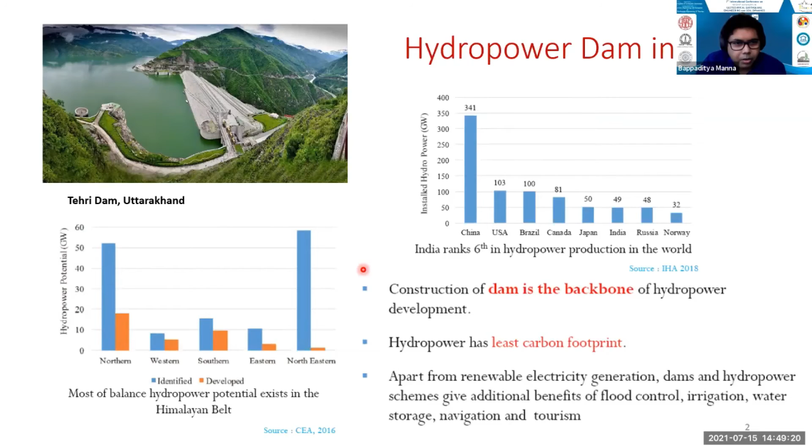Now, if you see the problem of dam foundations, it happens because there are a lot of uncertainties involved in the properties of the rock which exists at the identified potential site. Because the dam is a massive structure, it develops high stresses in the foundation due to the large load imposed by the dam body itself. It has been found that 21% of failure cases happen due to foundation failure from the excessive load of concrete dams. So therefore, the most important problem we found is the soil structure interaction with the dam and rock foundation, due to troublesome geology, which needs greater attention.

And we need to understand that if there is some joint which is filled with clay material, or if there is some shear seam existing at the site, how to build a dam foundation with proper design.

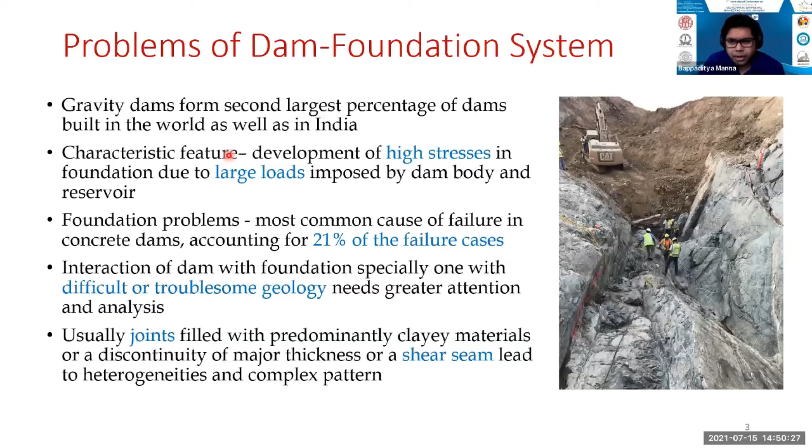So therefore, this kind of similar problem arises at a certain location. I'm not disclosing the location because of the NDA agreement between IIT and the client. There is one site proposed for a hydroelectric project of about 1200 megawatt power, and we found that on the right bank of the site, a huge rock slope failure happened, and therefore this part became very unstable. Cutting of the slope was not possible, because whenever we cut the toe, all the slopes started failing.

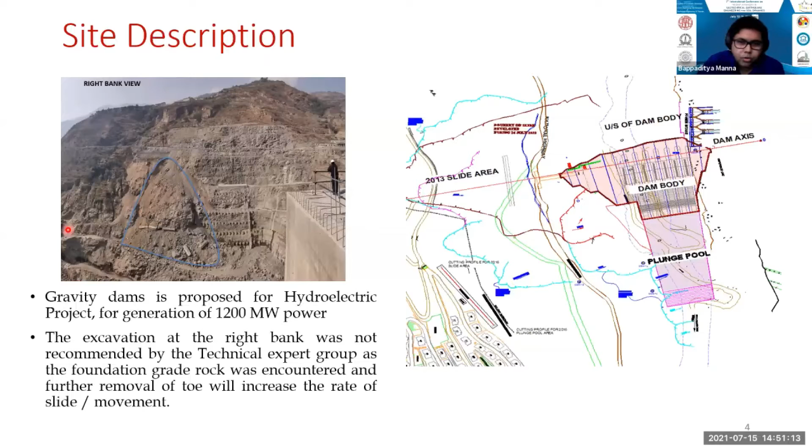And you understand there is a huge mass. If this kind of failure happens, the whole thing will just be crushed away. So therefore, the client approached us and told us that 1 to 13 has been proposed.

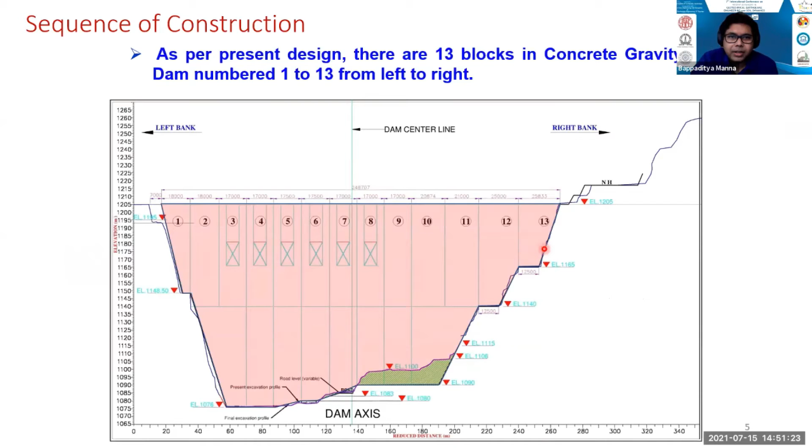These are the 13 different segments of the dam, out of which 1, 2, 11, 12, and 13 exist on the left and right part of the slope, which is okay. But in 8, 9, and 10, there was a lot of weathered rock, and if you start cutting here, you may reach the parent rock or the foundation rock.

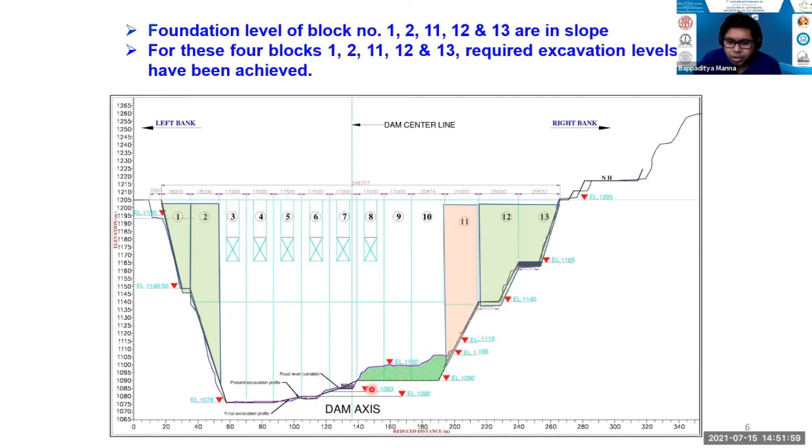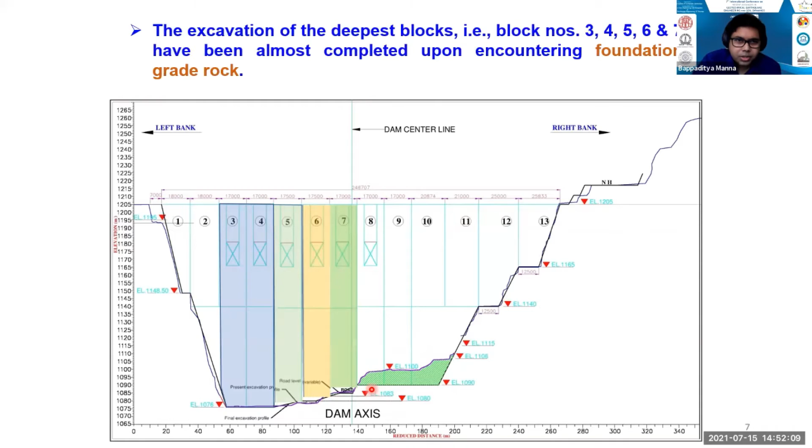But the problem was that when you start cutting this part, the whole thing may get collapsed on the right bank. So there was an issue of how to tackle this problem and what the possible solution is. So 5, 6, 7, and 3, 4 are also okay because they reached up to the foundation grade rock, so the construction and excavation can be done there.

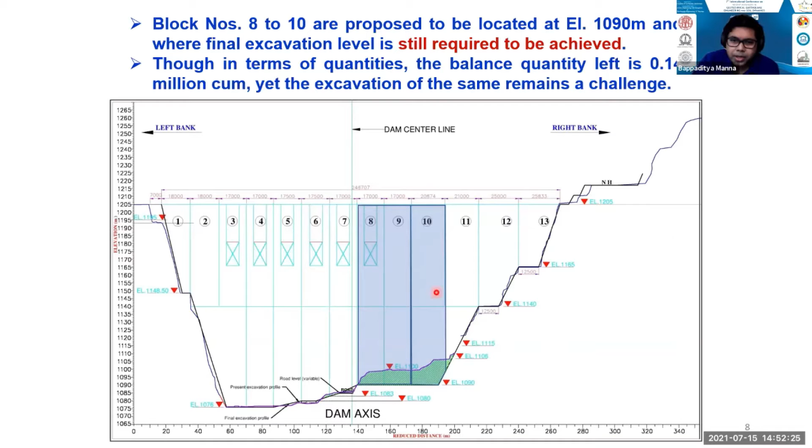So the challenge arises for blocks 8, 9, and 10, where you can see a lot of loose material exists, and you can't cut it because the right bank slope will become unstable.

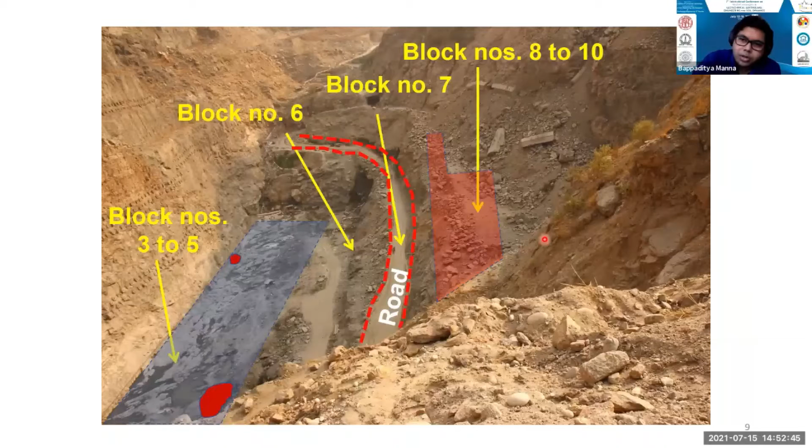So you can see on the site location, this is the location of block 8, 9, and block 7, 6, 3, 5. There was no issue there, but here there is an issue because you can't excavate further to reach the parent rock or foundation rock, because otherwise the right bank will collapse.

And one more challenge was that during the soil investigation or ground investigation, it was observed that a shear zone exists at the exposed cut slope, lying just below between blocks 6, 7, 8, and 9, having a thickness of around 8 meters.

So therefore, they suggested not to excavate further, and that we need to first take care of the shear seam and also the loose soil. So there are two things: one, we should not cut further because of possible collapse of the right bank, and two, we need to take care of the shear seam existing below the foundation.

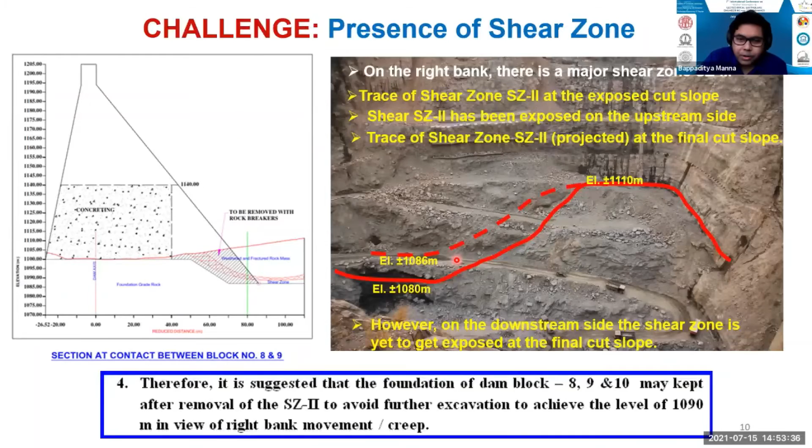So therefore, they suddenly came up with a solution: why not place piles at certain block numbers? So they placed pile foundations at blocks 8 and 9, expecting that the maximum load from the superstructure, meaning the dam, can be transferred to the parent rock or bedrock, so they can avoid stresses of the load on the shear seam. That is basically the load transfer they are expecting, so that you can place this foundation and build a dam at the various blocks.

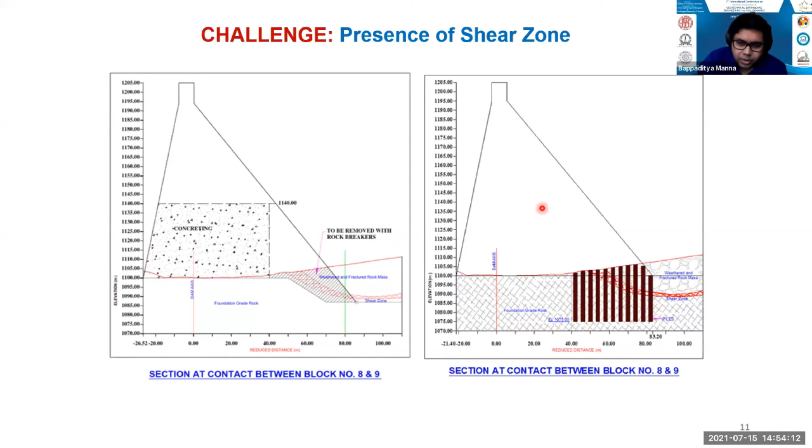So now the client approached IIT Delhi, so we worked out the design philosophy first, as per the IS code. IS 6512 is a very well established code for the design of the solid gravity dam. There are 7 load combinations.

I am talking about this part because this conference is more inclined to the earthquake. So here I will show how we can take care of load combination A with the earthquake and load combination B with the earthquake, and how the result comes out, whether it is in favor of the design or we need to go for some modification.

And another thing is that the earthquake analysis has been done with two cases: one with the pseudostatic analysis, and one with the site specific seismic data.

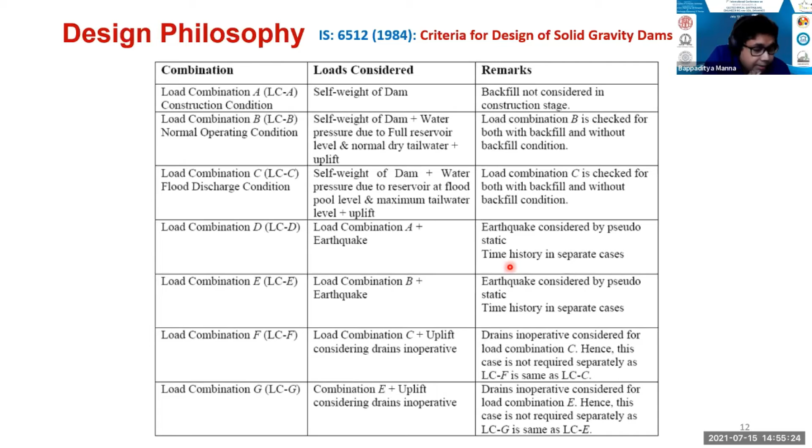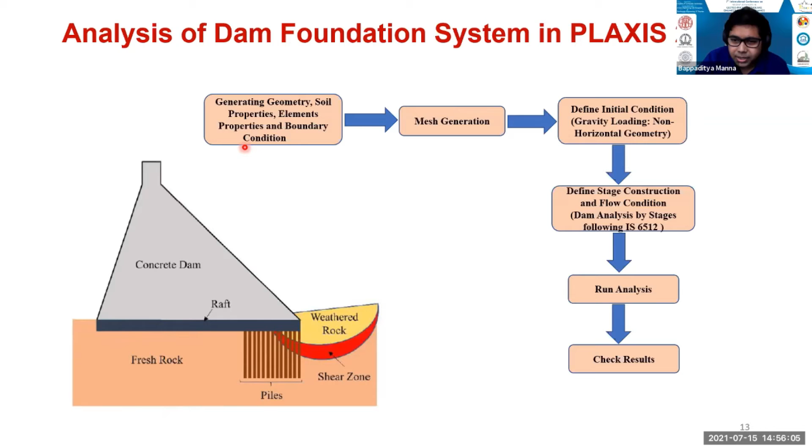This is the standard procedure: creating geometry, generating the mesh, defining initial conditions, then stage construction as per the site construction process, then running the analysis and checking results. Here is the site map, and as per the same geometry and material properties available, we try to replicate the same thing in Plaxis.

I'm showing you the steps we follow. This is the dam, and we introduce the wave load, and this is the dam body. Here is the backfill material. Here you can see the weathered rock. There is some shear zone, pile group, raft and hydrodynamic pressure, and the fresh rock.

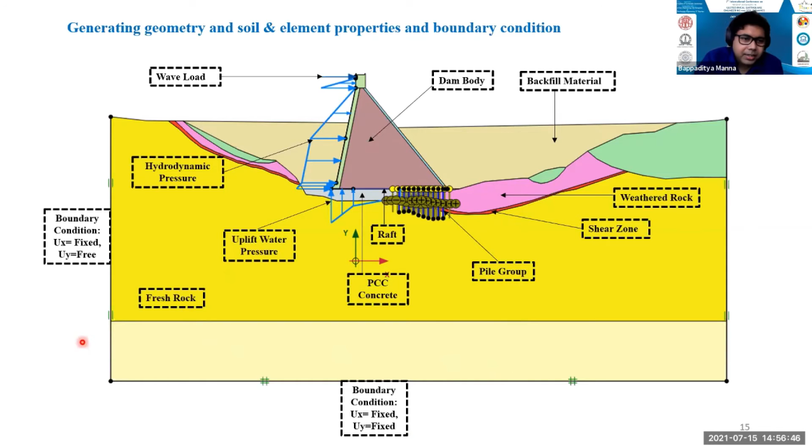This is a standard boundary condition. We consider the bottom fixed, and at the sides there is X fixed and Y free. This is a very standard thing.

As far as modeling is concerned, we consider the soil and rock with 15-noded triangular elements with cluster features, and the dam body is considered a 15-noded triangular element with polygon cluster feature. The raft is modeled with plate features, and similarly for the pile with plate feature, considering the effect of spacing in plane strain. The interface is considered to be a rigid element, meaning a rigid contact between the dam and the foundation soil.

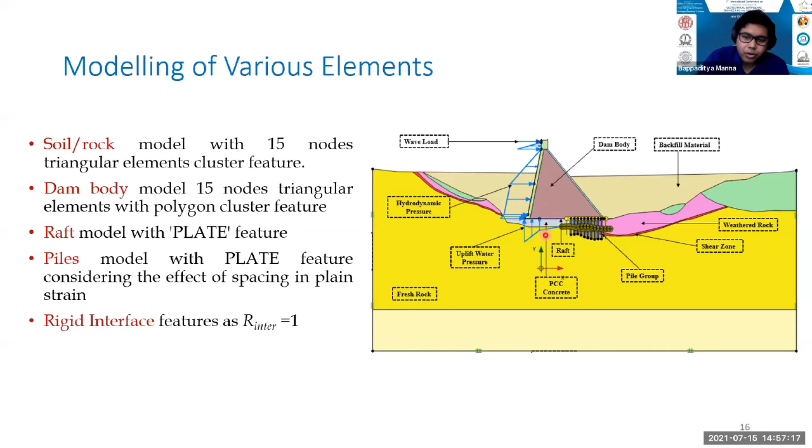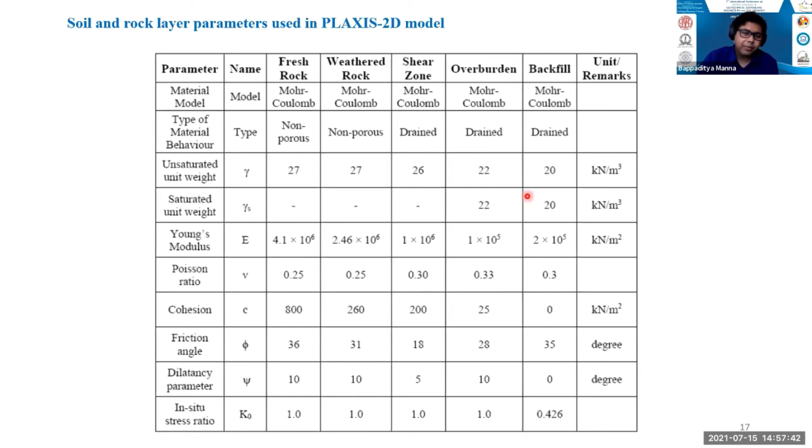These are the various soil and rock properties, based on soil investigation data obtained from the site. There are five major components: fresh rock, weathered rock and shear zone - though it's a big question how accurately we can get the properties of the shear zone - overburden, and the backfill material.

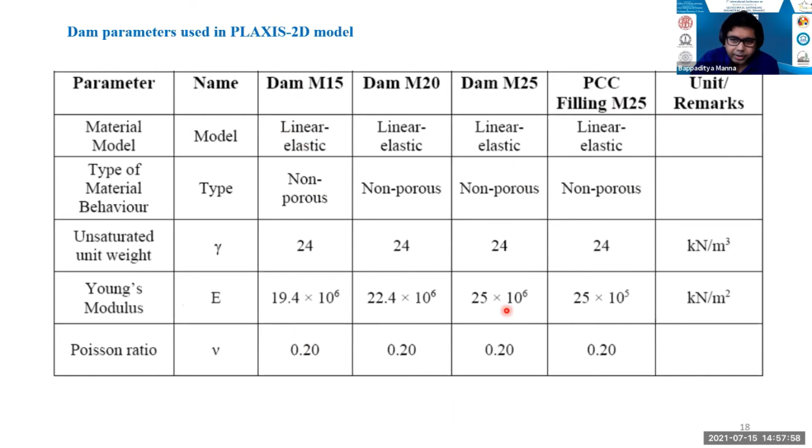These are the properties we obtained, and the dam parameters have been taken corresponding to M15. The PCC has been done with M25 concrete. These are very standard properties and standard processes.

First create and generate the mesh, considering the element with fine and coarseness factor varying from 0.25 to 1. For the initial condition, first apply the gravity loading to generate the in-situ stress.

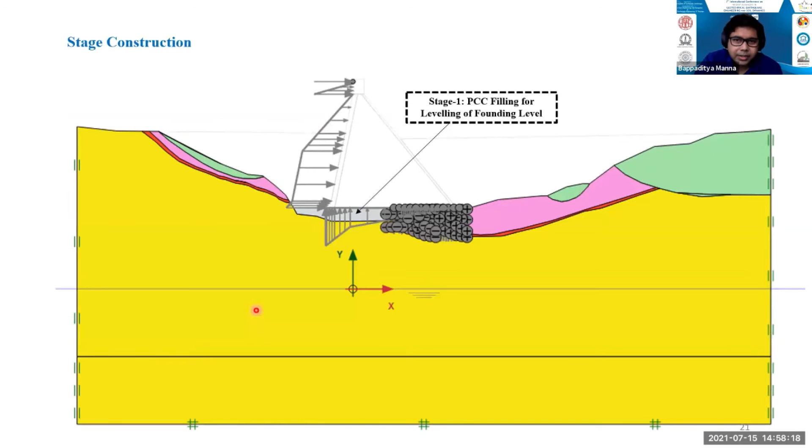The stage condition: first filled with PCC up to the foundation level. The second stage is the casting of the pile. Thereafter we cast the raft. Then we apply the load of the dam. The dam is constructed here, placed on the raft pile foundation system.

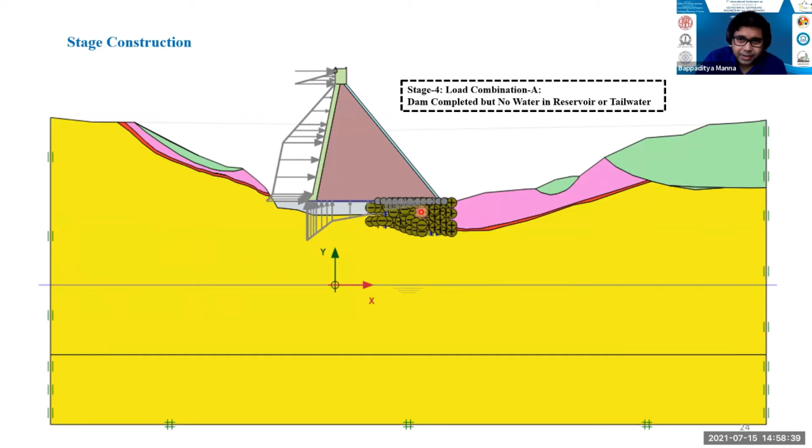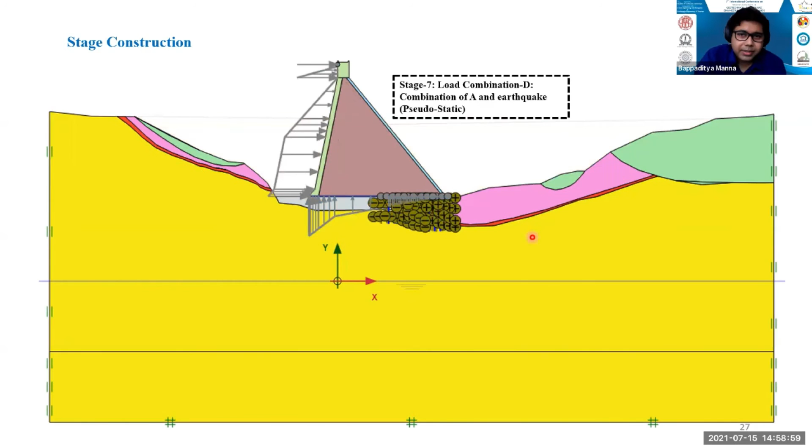In the first case, no tailwater is considered. In stage 5, we consider full reservoir elevation with no tailwater on the downstream side, and normal uplift pressure. Stage 6 is the reservoir at maximum level with all tailgates open, normal uplift condition. Stage 7 is the combination of A with earthquake, and similarly E is the combination of B with earthquake.

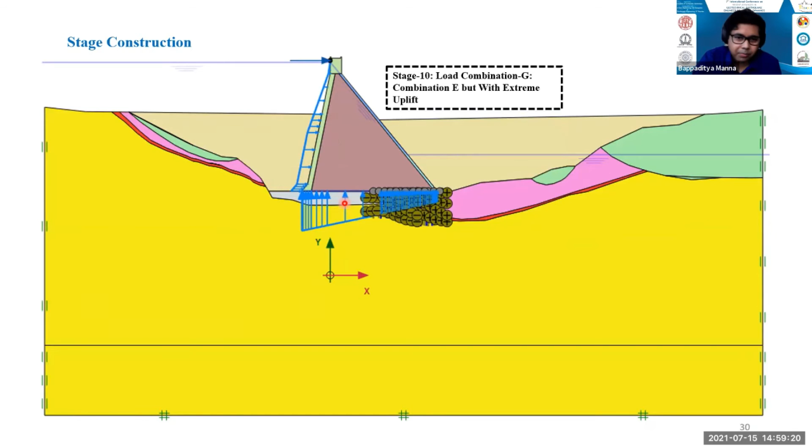This is the combination as given in the IS code, where all drainage holes are inoperative, for the maximum uplift condition. Similarly, load G is the combination with E, but with extreme uplift. So all combinations have been considered in the analysis.

Now I'll tell you how to get the parameters for the seismic condition and what results we obtain. As per IS 1893, the site belongs to zone 5, so we consider the seismic zone factor as 0.36. Our horizontal acceleration coefficient is taken as 0.36g, and vertical acceleration coefficient as 0.24g. This has been given as input to Plaxis.

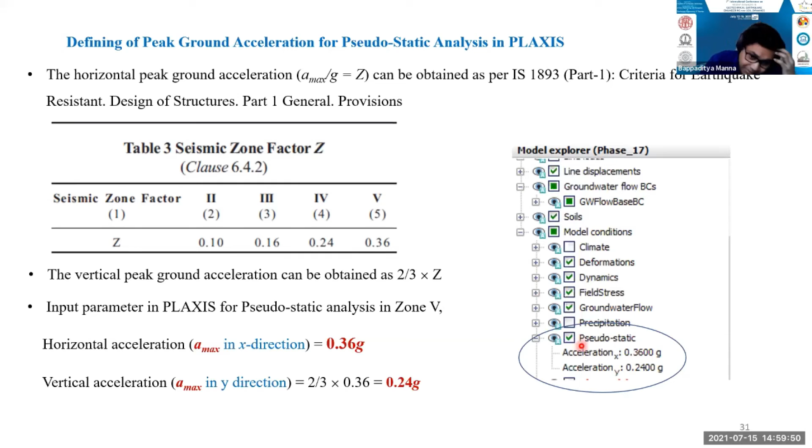The second analysis is based on site-specific seismic design parameters. A site-specific study has been done, showing the correlation of the epicenters of past earthquakes with major tectonic features. You can see different locations of faults - gravity fault, thrust fault, shear zone - and the project site location, with various magnitudes also indicated on this map. Based on that, the seismologist gives us two values.

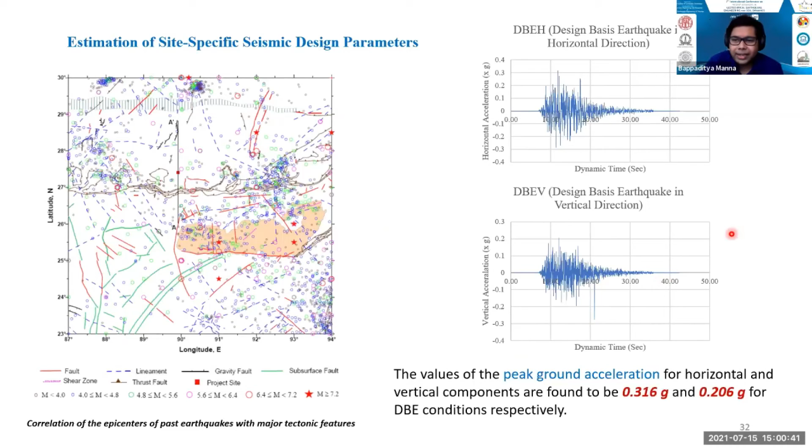One is the design basis earthquake time acceleration history in the horizontal and vertical directions. Based on that, the peak ground acceleration for the horizontal is 0.316g, whereas the vertical case is 0.206g. We apply both cases in the Plaxis model to see how the dam and foundation system respond.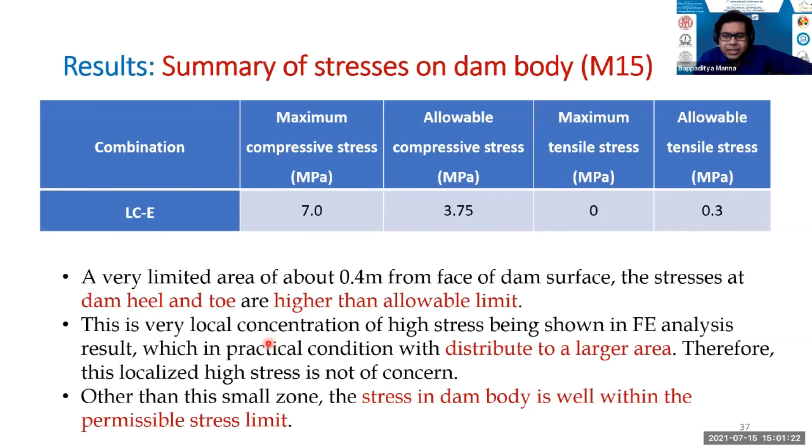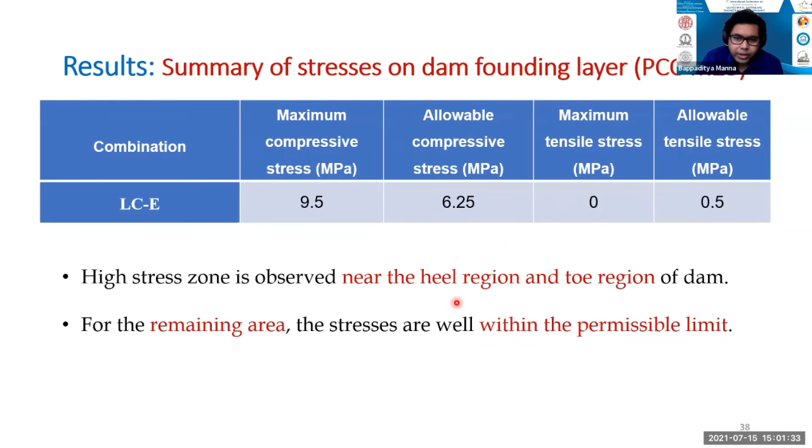What we found is that maximum compressive stress just exceeds the allowable compressive stress at certain locations, that is at the toe and heel level, while other parts are okay. Similarly, for the dam founding layer at the PCC level, it also exceeded near the heel and toe region, but other parts remain stable, within the permissible limit. Similarly, at the rock foundation, it has been found to be less than the allowable peak rock mass compressive stress.

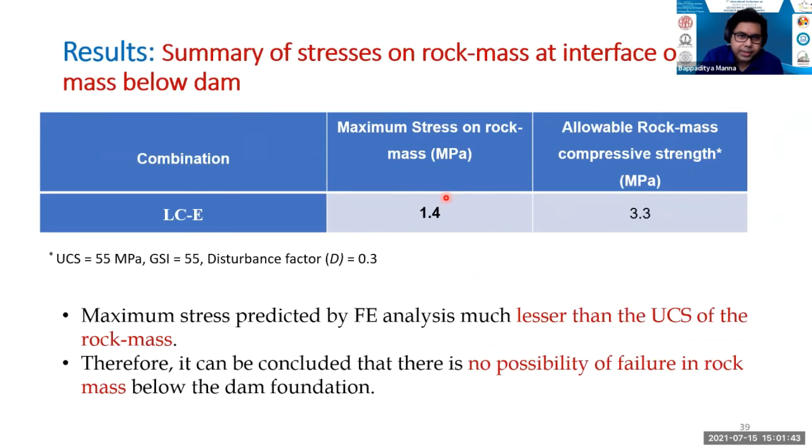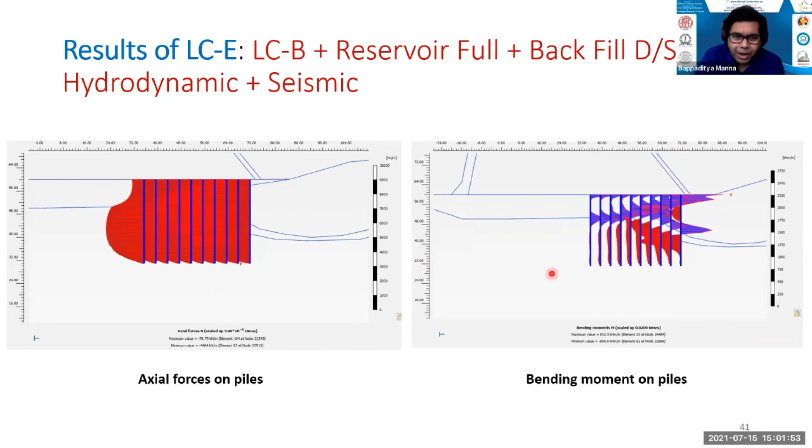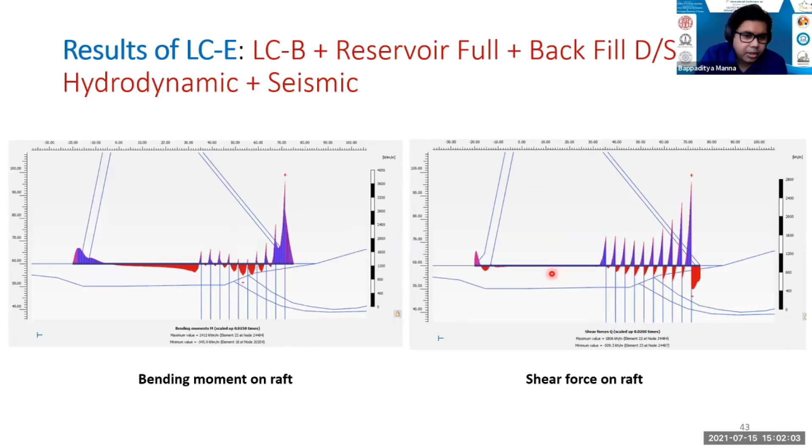So if you see the behavior of the structural members, that is the raft and the pile group, you can see the settlement response, the axial forces and the bending moment on the pile. This is the shear force of the pile that is required for the calculation of reinforcement. That is not the concern of geotechnical engineering, but we pass on all this information to the structural engineer. This is the bending moment and shear forces of the raft, which is very standard.

So what we found, as a geotechnical engineer, is that pile axial force is well within the permissible limit, because the allowable vertical pile load is around 4,000 tons, which is much more than what we get. And maximum settlement comes up to 43 mm, while the allowable is 50 mm.

If you see the latest code IS 16700, that is the criteria for structural safety of tall structures, it recommends 50 mm. But if you go by IS 2911 part 4, it says 25 mm. There is no code specified for what to take for dam foundations. Therefore, we adopted the value recommended for tall structures with raft pile foundations, so we went with 50 mm settlement, which is within the permissible limit.

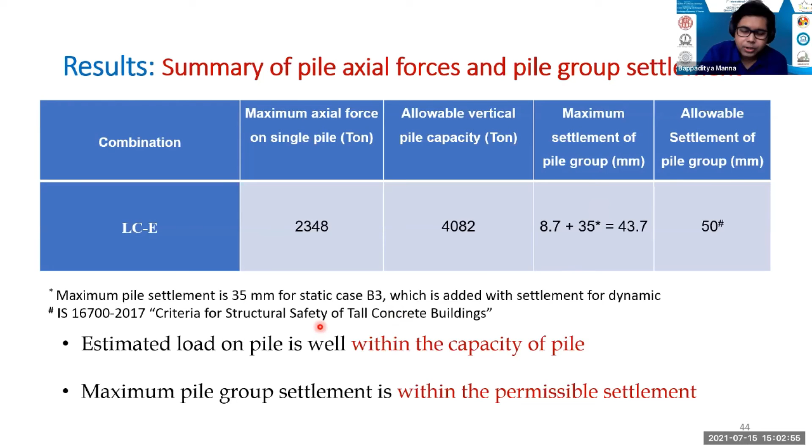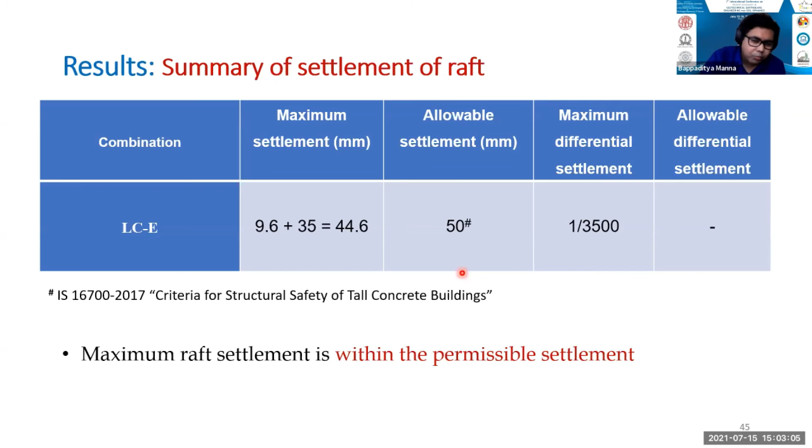Similarly, you can see the settlement of the raft is also within the permissible limit, but no maximum differential settlement criteria is given for the dam. This is almost negligible, so 1 in 3,500 is quite less.

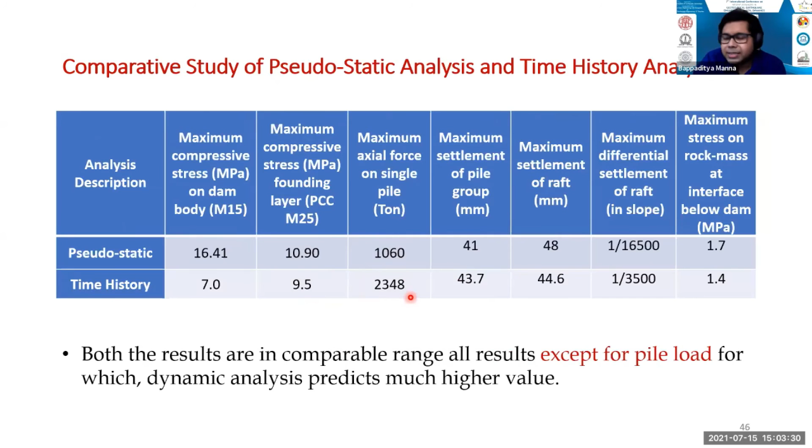We have also compared the pseudostatic analysis with the time history analysis, and we can see they mostly agree with each other, not much difference, except for the pile load, where the maximum axial load on the single pile is almost double. But still, with the time history analysis, that load on the single pile is less than the safe load carrying capacity of the pile.

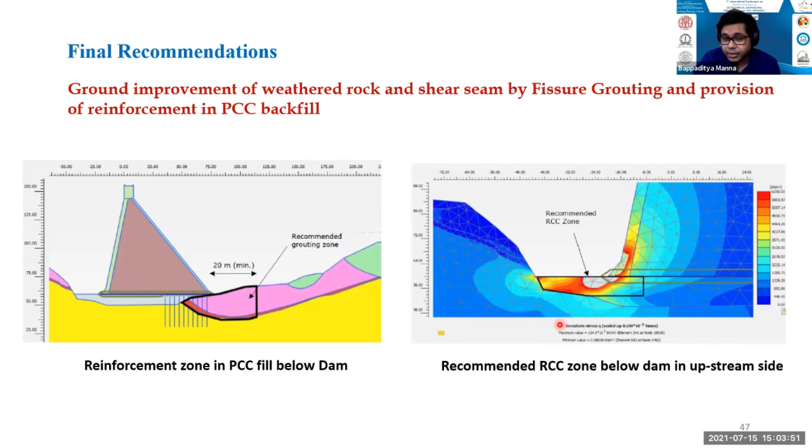So, final recommendation: we can reinforce the zone with PCC fill below the dam, and recommend RCC below the upstream side, where we are getting a very localized stress concentration. So this has been finally recommended.

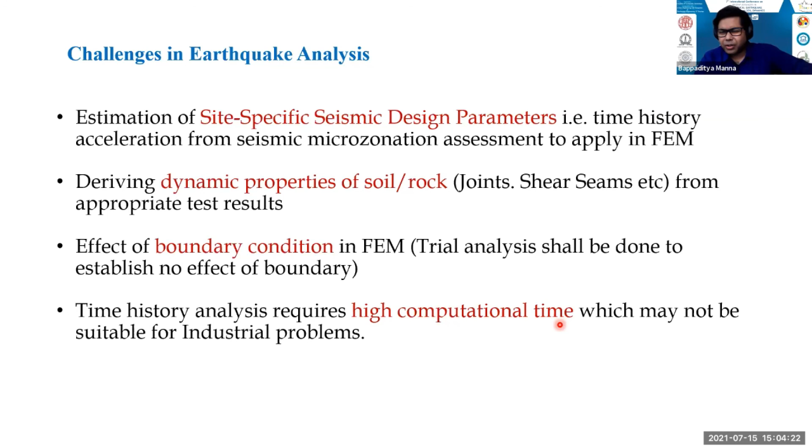I would like to add the challenges: getting site-specific seismic design parameters, which is the key parameter the entire analysis depends on, and the dynamic properties of the soil and rock, particularly joints and shear seams. We need to understand the boundary conditions, which requires a lot of trials, and this kind of analysis needs a lot of computational time, so it's not very suitable for industrial problems where time is very limited.